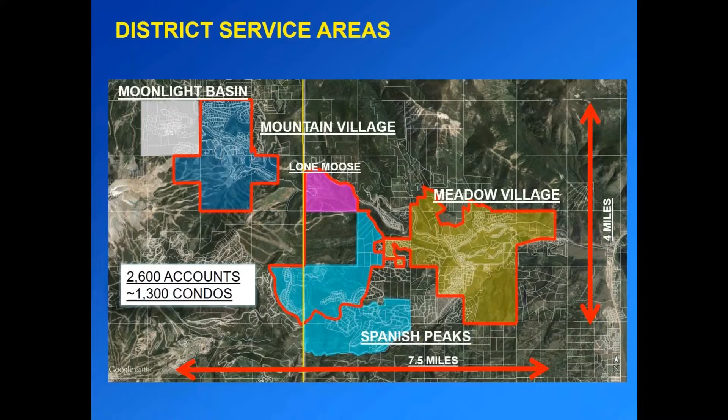These are some of our neighbors, and I think I got these boundaries off a little bit, but Moonlight Basin actually sits over in the other watershed over the divide. It's our neighbor to the west, the Yellowstone Club up here, Spanish Peaks South. Then the canyon, I don't have any boundaries around it, but it's outside our district. Our district's this little area right here.

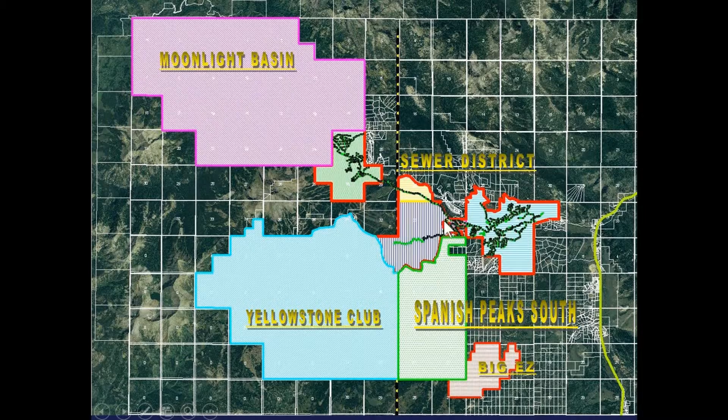Years ago, we used to have 3 separate independent water systems. The mountain was separate, Aspen Groves and the Meadow were separate. In 2006, we did a bond, borrowed money, and built a pipeline to connect the Mountain Village down to the Meadow, so we effectively have one big public water system. There's one footnote with this, Spanish Peaks.

They're in our water and sewer district boundary. They're connected to the sewer system, but they have their own water system, and they're running that independent of us. I showed their water tank right here, but that's theirs to own, operate, and maintain.

These are our public wells, these black little points. Our main water production's on the mountain near Lake Levinsky. The geology up there, I don't know if Richter's in the house, but the geology up there is totally different than what we have in the meadow here.

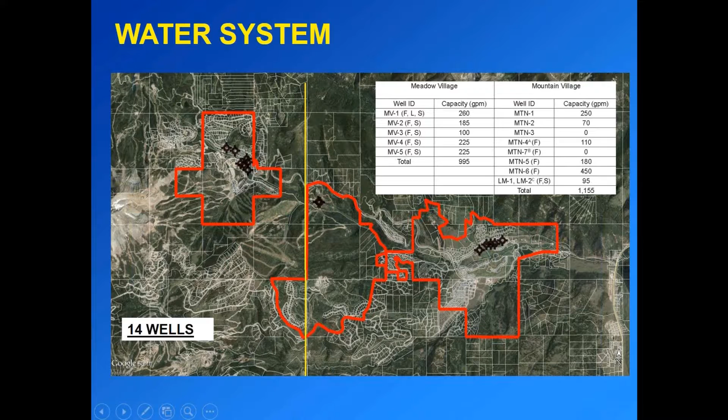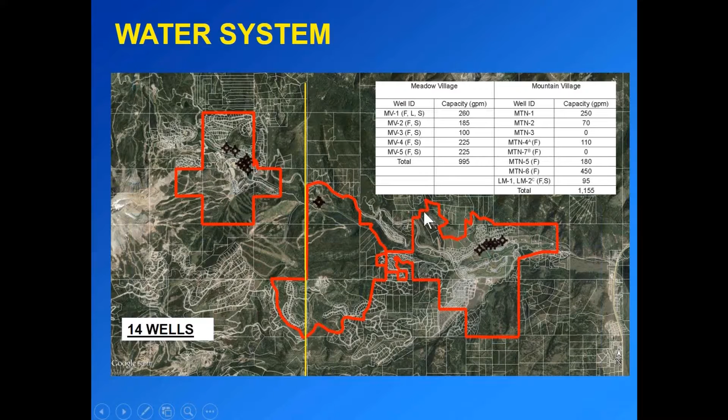So we've got 5 wells in the meadow, 2 we brought online this summer, and this is our bread and butter for water production in the meadow. We have the ability now to feed water off the mountain to the meadow, and summer irrigation demand is 10 times what our winter demands are for drinking water here, so we do divert some water off the mountain. This table here just shows our overall water production capacity capabilities with the current wells we've got, and we've got 14 of them.

This is our sewer system. This is Upper Cascade. All these little green points are manholes, and they're all connected with sewer pipelines. There's a line that runs down what we call the poop chute road, down into Aspen Groves, and our treatment plant sits way down at the end.

One of the beautiful things about Big Sky, with all this elevation, is we have no lift stations. If you go around the city of Bozeman, they've got lift stations everywhere, and they're a big maintenance headache. We're fortunate here that we don't have any.

You can see we've got green here in Spanish Peaks. That's all the sewer that's been constructed there that is in our district. We have taken those over. We own and operate the sewer up there.

Moonlight Basin's got its own treatment plant and their own operators—they run their own gear up there. Same thing with the Yellowstone Club. They're in the process of actually starting up a brand new SBR treatment plant, and I'll show you what ours looks like in a little bit here.

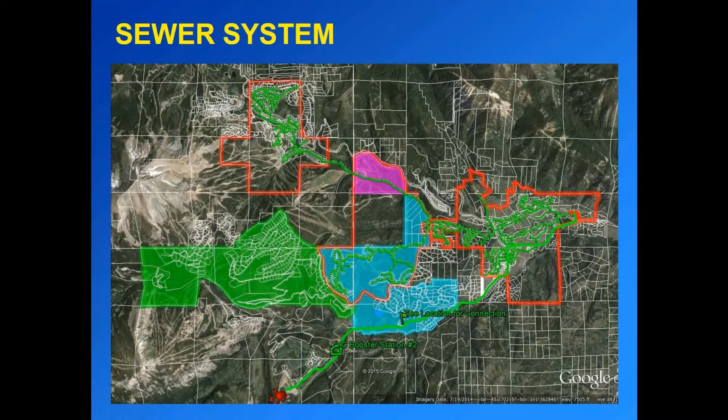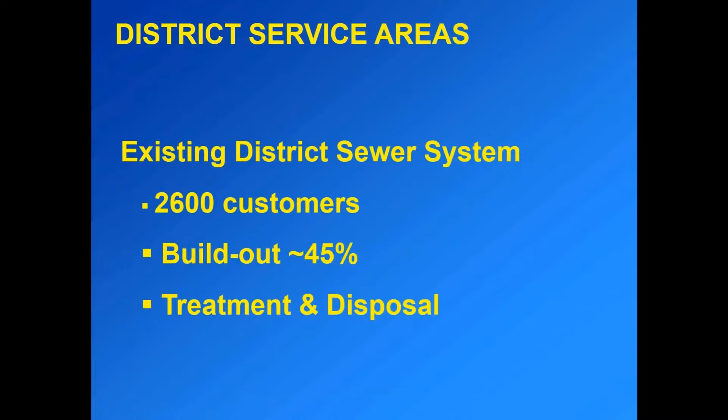So our district service area, we've got about 2,600 customers. We look at customers as billable accounts. We estimate that we're about 45% built out, and depending on who you talk to, that number varies on what we think our build out is, and at what time of year you're counting, because we get so many people here with tourist impact to Big Sky.

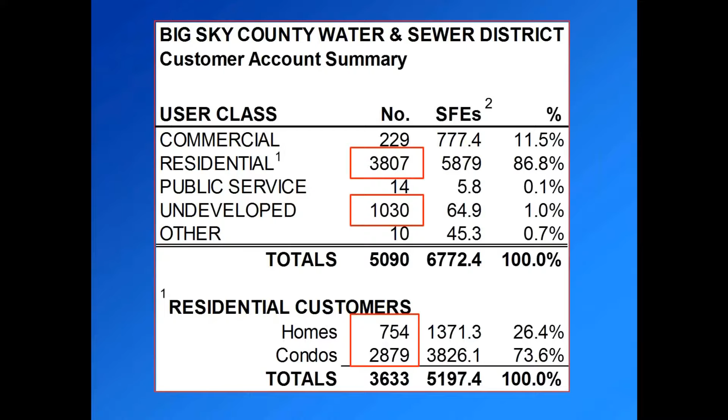This is a breakdown of our customer base. You can see we're dominated by residential, 3,800 residential type connections. We've still got a lot of undeveloped lots on our books. And what's interesting here is we've got a lot more condominiums than single family homes, which I think makes us unique from most communities. Belgrade and Bozeman, they all have single family homes, some multifamily stuff, but not that much.

So SFEs—if you come to our board meetings, you hear us talking about these things a lot. It's the basis for which we issue permits when you're connecting a new home, condo, or commercial project. We look at the square footage, and from that we know how many gallons per day per SFE we average over the years. So it gives us a benchmark to look at our growth over time. It's also a funding mechanism because we charge for those SFEs when you permit—it costs X dollars when you connect water and sewer, and the multiplier is the single family equivalents in that permit application.

This is the table on how we determine what the SFEs are for single family and condo projects. So if you're coming to us with a condo, we look at how many square feet the condo unit's going to have, then we multiply by 0.85 and get a single family equivalent value for each unit in that structure. A water meter is required for every condo unit, every home. When I started here, there were no water meters in Big Sky—we got those done starting in '01, finished in '03. That became the basis for billing, and it's a real effective tool to manage irrigation demand as well.

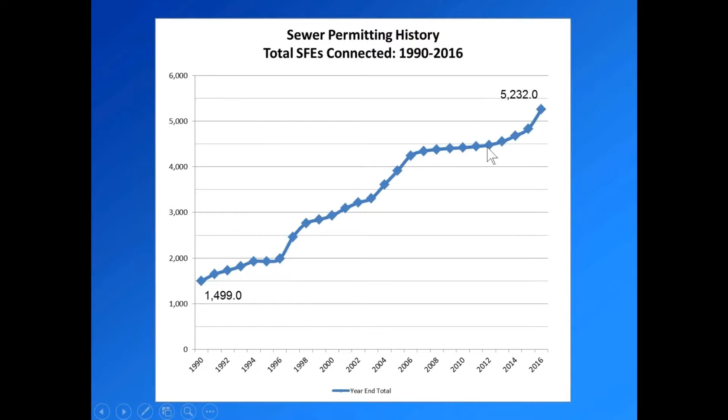I think it probably impacted our curve and flattened it a little bit, and you see that reflected in the data right here. We flattened out a little. Plus we had a recession immediately after that, which didn't help.

This is the breakdown by year of how many SFEs have been permitted. You can see the big dip here is the recession. There was very little permitting, especially for new construction. We were doing some remodel permitting, small stuff.

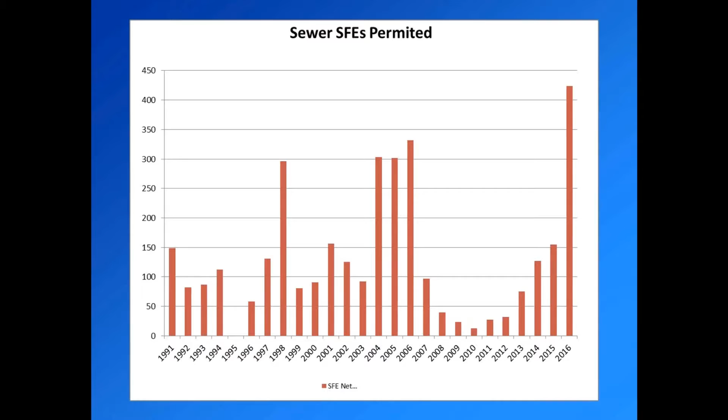And then as we come out of the recession, here we go. We've got a record year going on right now. That does include the lodge project in Spanish Peaks that some of you may have heard about. It's a very large project. It's been permitted, they aren't even into construction yet, but it's in our books, so it's reflected here.

DEQ, no offense Todd, you put the hammer on Big Sky. Put a moratorium in place, you couldn't build. So we had 3 years where you couldn't build a structure.

Then we got the moratorium lifted in July of '96, and we took off. There was some pent-up construction demand there. So since '96, we've averaged about 5% growth in single-family equivalents.

Technically, it wasn't that you couldn't build, it's that you couldn't hook up. That's a pretty big point. Yeah, no, in fairness, yes, that's correct. But if you were hooking to our gear, you could not. Right, but there's a lot of development around us that isn't connected to us.

So now we're going to look at our wastewater situation a little closer, wastewater capacity. When you look at wastewater systems as a whole, you look at capacity in 3 buckets: treatment, what your plant can handle; storage, in our case, because we're storing it, most plants don't do that; and then disposal capacity, what do you do with the treated water once it's gone through your treatment process?

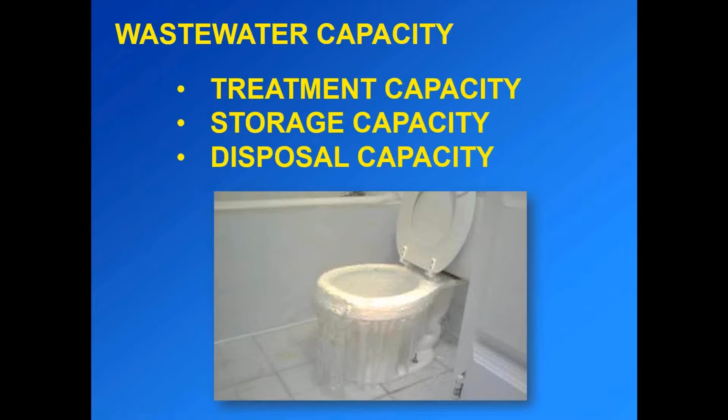We've got an SBR, an acronym for sequencing batch reactor. It's an activated mechanical plant. It does very well with big swings in flow, and that's one of the reasons we chose that technology, because we get big swings in flow, as we'll see when I show some of the graphs I've got. With our winter population and skier visits, we see big numbers.

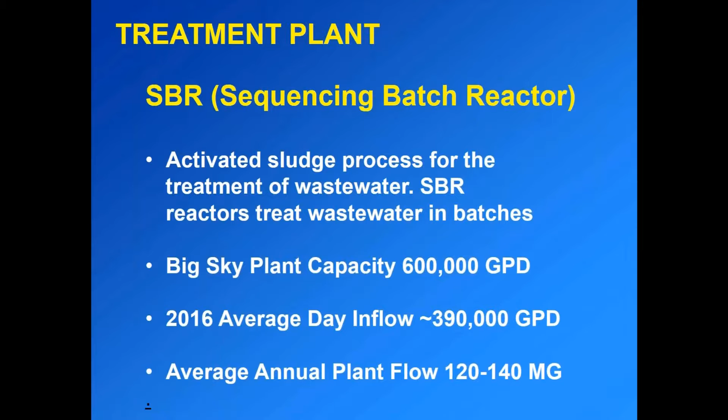I got 5 minutes left. Are you kidding me? No. You can have my... 10, I'm going over a little bit. So this is a breakdown. Only if they want me to. If they want me to sit down, I'll sit.

So this is a breakdown, I went from November of '14 through January. This is an annualized flow coming into our treatment plant. You can see our big numbers are in January. Our biggest day of the year is December 31st, just like clockwork with the skier traffic we get. And we saw it two years in a row, we get this big, big spike.

Our average flow right now is about 390,000 gallons per day. We'll spike up to almost 700,000 gallons a day on that weekend alone. It's crazy.

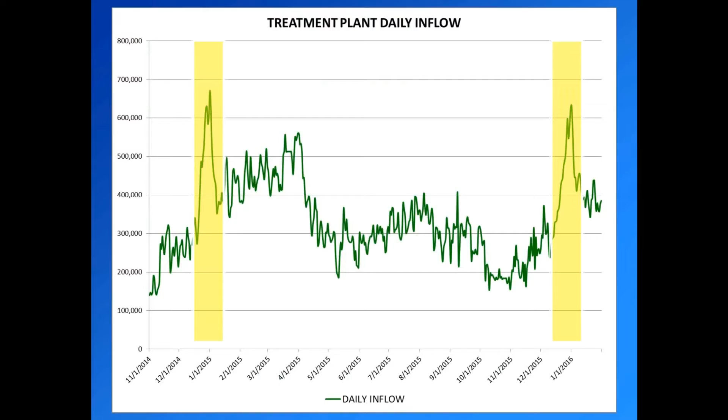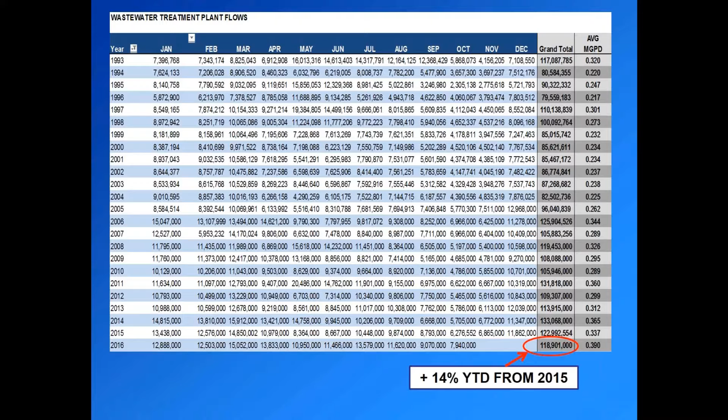This is a busy table, but we're 14% ahead of last year when you look at year to date through October, 2015 to 2016. So we're seeing some scary numbers coming at us.

Annual wastewater flow over time, projecting out, I figure we're going to be close to 140 million gallons for the year. To give you some scale on these things...

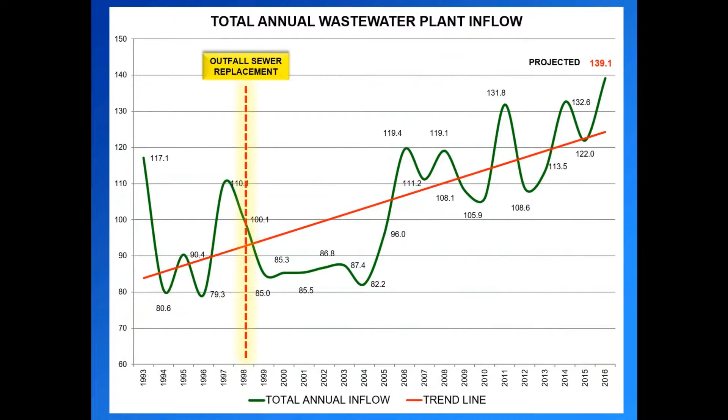City of Bozeman in their last quarterly report discharged almost 500 million gallons in 3 months. So their average day flow is 5 million a day. Ours is a little less than 400,000.

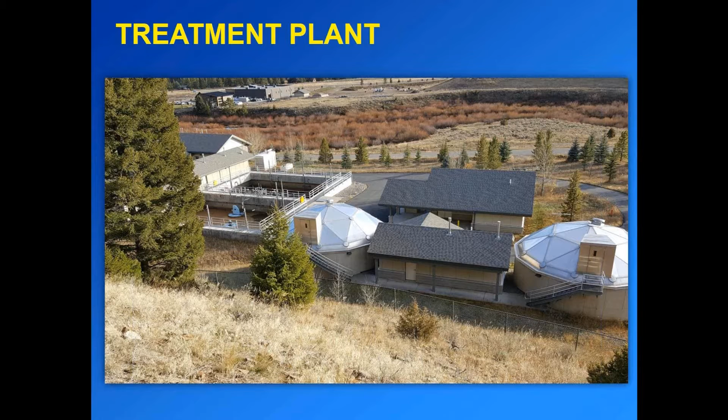This is a shot of our treatment plant, which sits down here next to the park. This is up the side of the hill. Headworks, these are the different building components.

So I'm going to explain the process a little bit because it is complicated here. This is an aerial shot of our plant, and the sewer comes in next to our storage ponds. Sewage flows into the plant through the Headworks building. These are the screens, the initial screening that happens, and this takes out the big stuff. Then we've got grit removal over here to take out sand and the fine stuff. From there, it goes to our SBR.

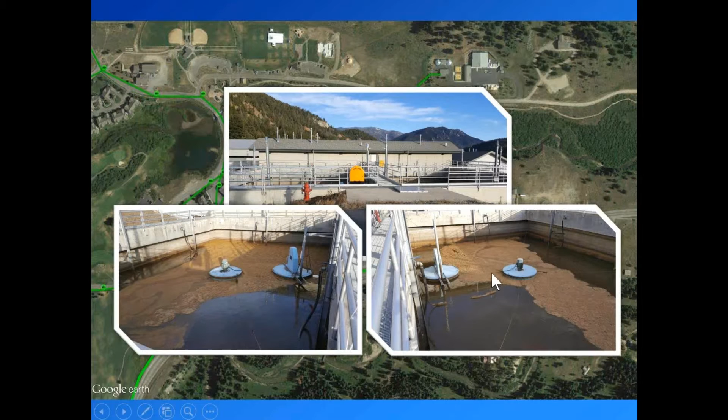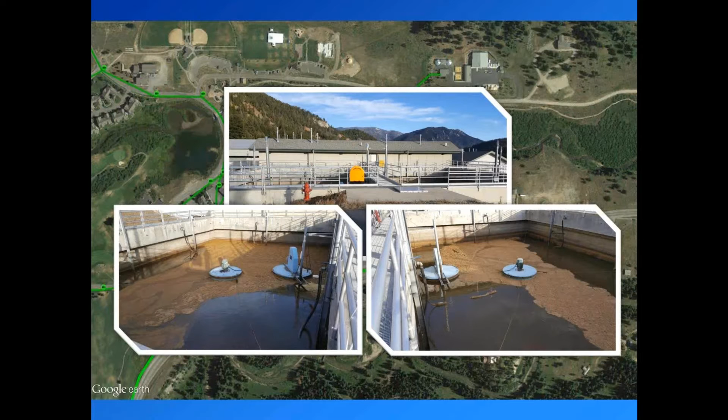We've got two very large concrete basins. The wastewater goes in there, and you just pour air into it to keep your biology going. Then you shut it off, it settles, and you decant off the top. So it's just this cycling process all the time. Then it's returned up to these storage ponds once it leaves the plant.

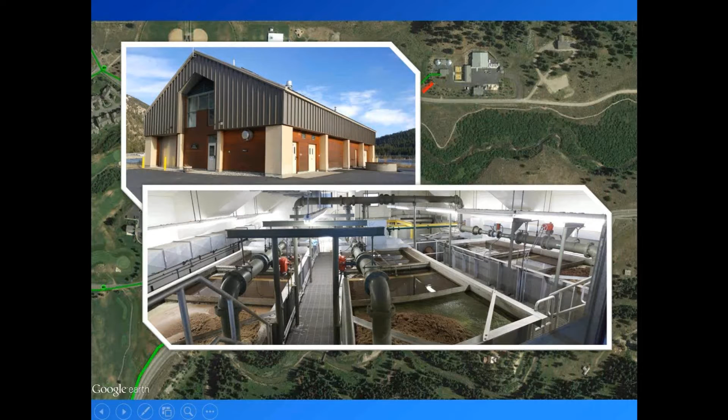And then we have a small pump house where we can pump from there up to the filter building, which is this building right next to us. That's got sand filters in it, three trains. So we actually have tertiary treatment here. Everything's spread apart, but we do have tertiary treatment. It leaves this building, goes into the irrigation pond.

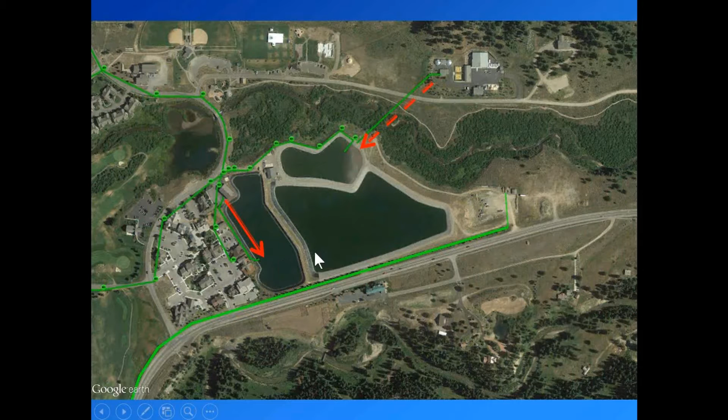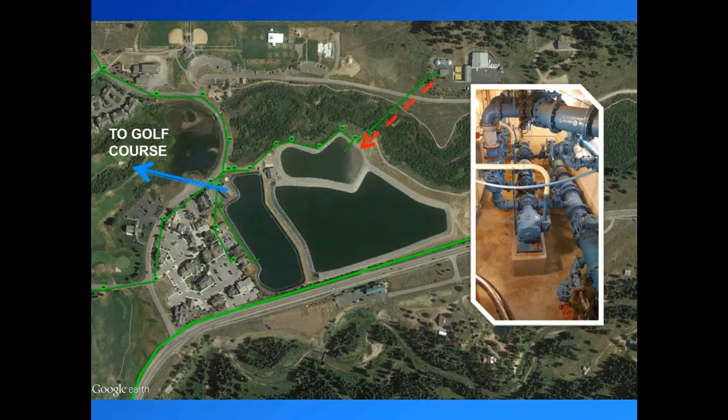From there, it goes to the large pond, where we hold that water through the winter. You look there now, they're all drawn down. We'll fill them up this winter to repeat the cycle. We have big pumps in the basement of this building that allow us to pump water in big volumes to the golf course, where it gets spray irrigated during the summer months. We start irrigating about May 1 and we shut down in October.

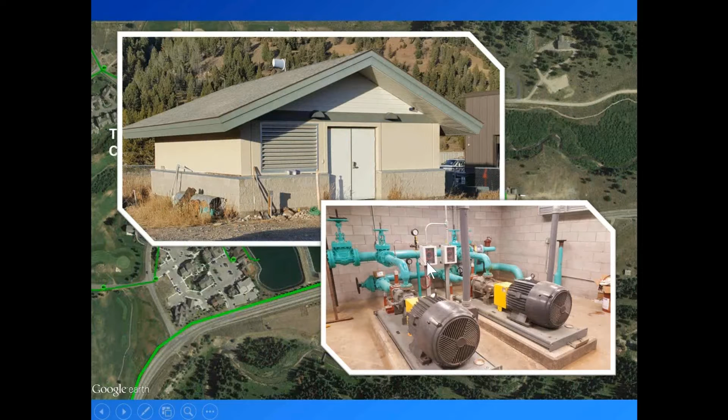We also have the ability to take water from the large storage pond to this pump house below us. I like pumps, I guess, I gotta get pumps in all my pictures. So this allows us to pump water all the way up to the Yellowstone Club pond.

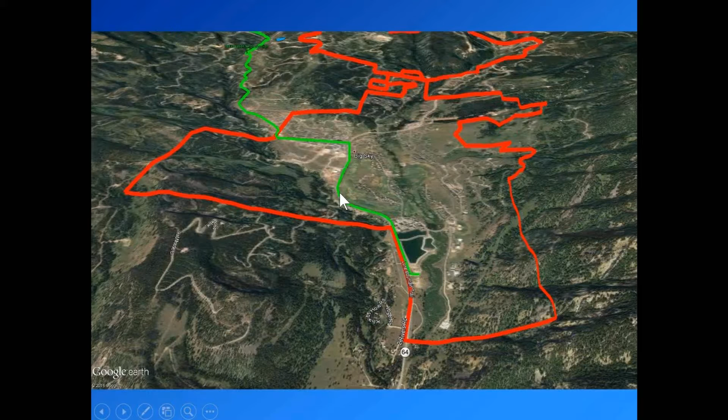Red line is our district boundary. Green line is this force main pipe. We call it a force main because it's pumped, it's under pressure, it's not a gravity line. It's pumped 7.2 miles up to the club.

This blue thing here, Spanish Peaks is working on a new pond that'll be lined, that we'll be able to put a pipeline to, adding capacity for storage, and they're going to add their golf course to the system. So we're looking forward to having that.

We've got a second pump station because there's so much elevation. We have to have a second station to get water all the way to the top, and then it goes up to the club's storage pond, which is a little over 80 million gallons. This is YC's golf course here, so this water then gets used for irrigation on the YC course.

As a sidebar, we compost 100% of our sludge that comes from the plant. It gets sold at $25 a yard, and we really don't have any trouble getting people to buy it. We don't advertise in the valley because we're getting rid of it up here with no problem.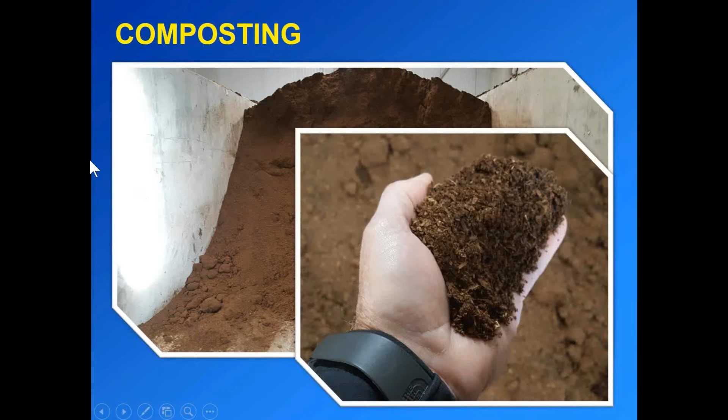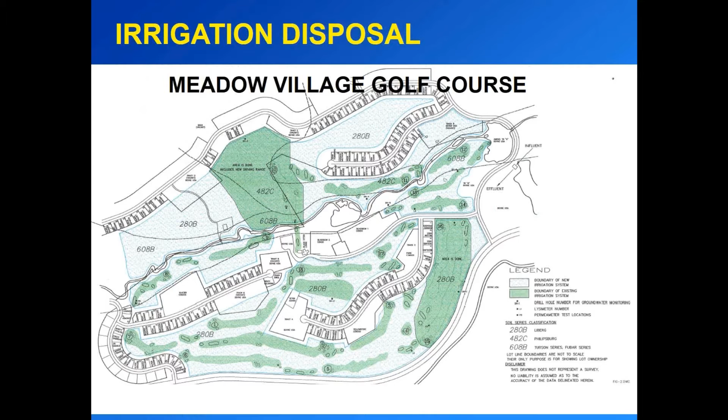So irrigation disposal, where we hang our hat for all this. This is the Meadow Village area and the Meadow Village golf course that Big Sky owns and runs. This is a map view that kind of shows where these holes are. So right now, and for years, 100% of what we took in would go to these golf courses. And then we built the YC line in 2002, finished in 2004, so that's also available to us for irrigation.

And engineers do their best to come up with estimates on how much irrigation can go to any of these courses, and it's really a range of numbers depending on a lot of variables. The biggest one is rainfall. So the engineer looks at your soils and designs around the wettest year in ten. They look at your elevation, how many irrigation days you're going to get in. We're different here.

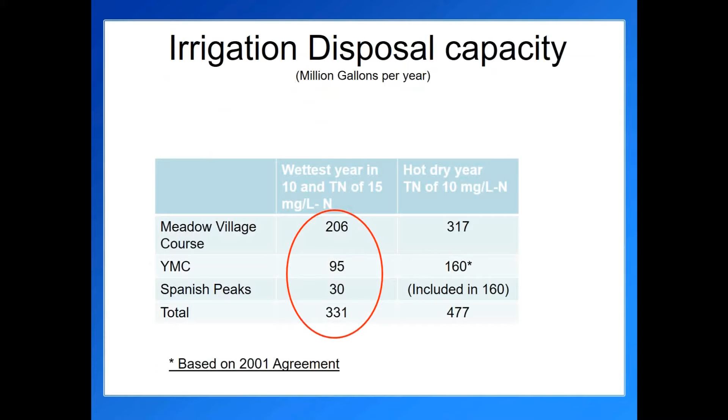We have more here than the club or the course at Moonlight or the course at the Yellowstone Club. So they give you their best guesstimate as far as how much water we can put on the course.

In our facility plan done in '98, finalized in 2000, the engineers said based on those parameters, we've got 137 days of irrigation available, 143 million gallons. That was just to this Meadow golf course. But it's also wrapped around the wettest year in 10. So what do you do with the wettest year in 50? You're going to be over irrigating. So you've got to have other places to go with this stuff.

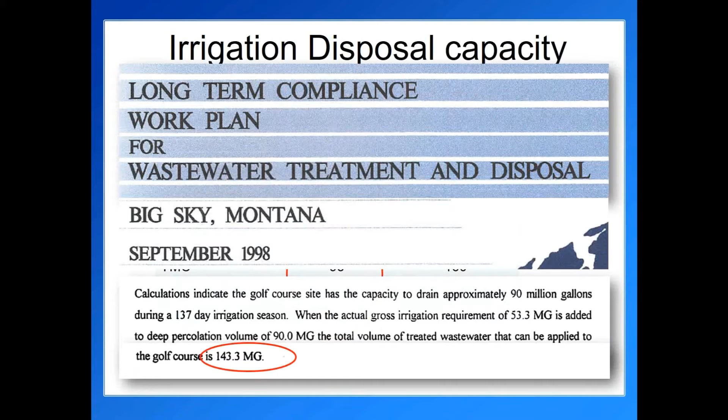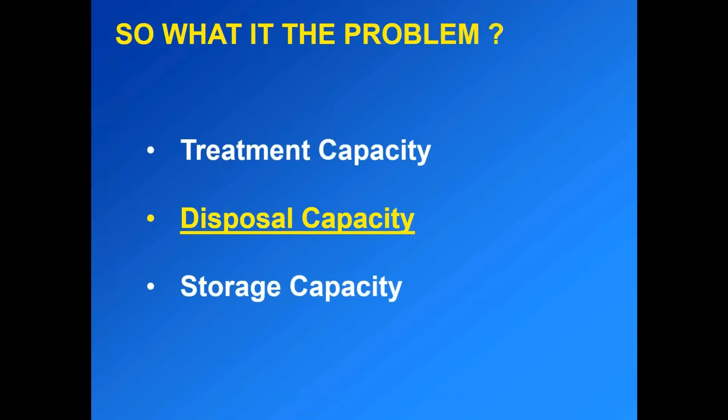So what's the problem? Treatment, disposal, storage. Our biggest issue here is disposal. We can treat it, we can expand the treatment plant, storage is complicated but you could build more storage. It's always, what are you going to do with the water after it's gone through this treatment process?

Another little sidebar, we actually had a discharge permit. It was issued April 1 of 1999. Todd remembers this, he was at the hearing with me in '98 at the courthouse in Bozeman. That was issued, we never used it, we never built the pipe. A lot of people in Bozeman thought we were discharging to the river, all this stuff. But the permit that was issued then said you can only discharge during peak runoff, March, April, May, June. That added up to 15 million gallons a year, which we let that permit lapse in about 2008. I think we held it for 10 years, and now if we were to ever apply for another one, it's a whole new process.

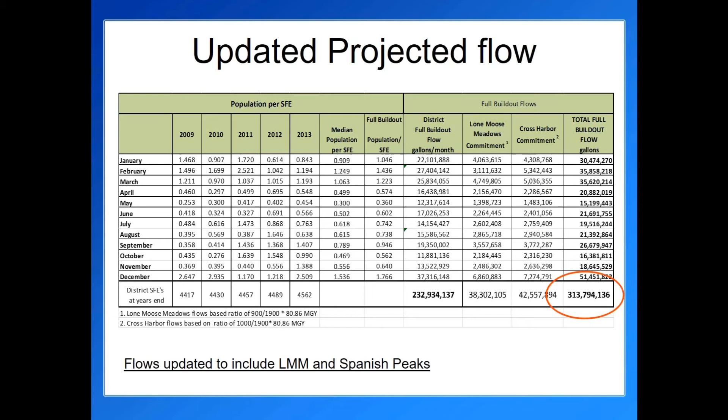So this gets back to the question, what's the problem? Our engineers are projecting, we've updated all these studies. The resort areas around us are doing studies. How much is the top end of all this wastewater need going to be? We're trying to get our arms around it. The engineers have projected that under different growth scenarios, we're going to need to figure out more options to manage this wastewater problem over time.

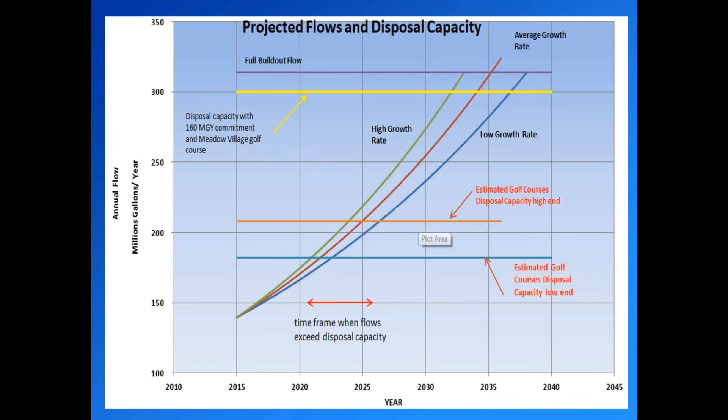And again, it's a continuum, depending on what growth rate you pick, what your full build out is. Occupancy is huge here. If we were 100% occupancy year round, we'd already be out of capacity, but we're not. We have a low occupancy rate, and that varies as you go across. Yellowstone Club's different than the Meadow folks here. Moonlight's different than YC, so very difficult things to get your arms wrapped around.

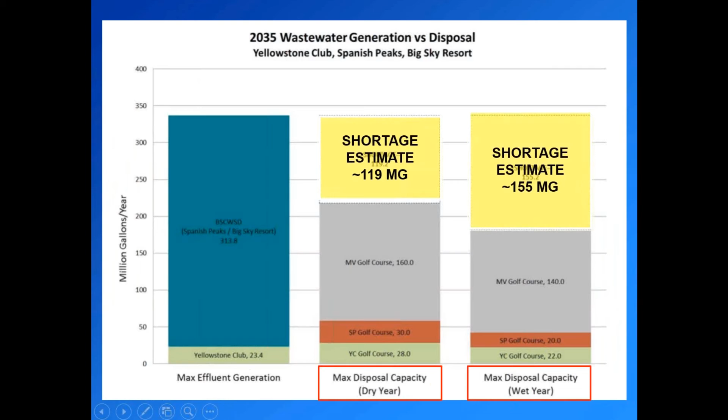So this just drives the point home a little bit. When you look at all these studies, looking at the Meadow course, the Yellowstone Club course, and Spanish Peaks course factored into that, how much can we manage to get rid of each year? Engineers estimating we're going to be short by about 119 million gallons. That's in a dry year. In a wet year, the gap gets wider because you're not going to be able to irrigate as much. So they're giving an estimate there of 155 million.

So what are our options? Quite a few. Expand irrigation, groundwater discharge, that requires a discharge permit. That could be engineered drain fields, that could be drilled wells, kind of like what they do in the oil patch. Snowmaking, we look at snowmaking a lot, Mike's going to talk about it in a little bit. Snowmaking would require a surface discharge permit because if the snow is going to melt and run off into a stream, it's going to need a surface discharge permit.

Stream surface discharge permit, small decentralized treatments. I'm not a big proponent of seeing treatment plants scattered all over Big Sky, but that could be an option where instead of having one big central facility, you start putting all these little packaged treatment plants all around Big Sky. Combinations, all of the above, and I guess one of the objectives of this group is maybe there's others out there that we haven't really looked at. So that's part of this process that we're in.